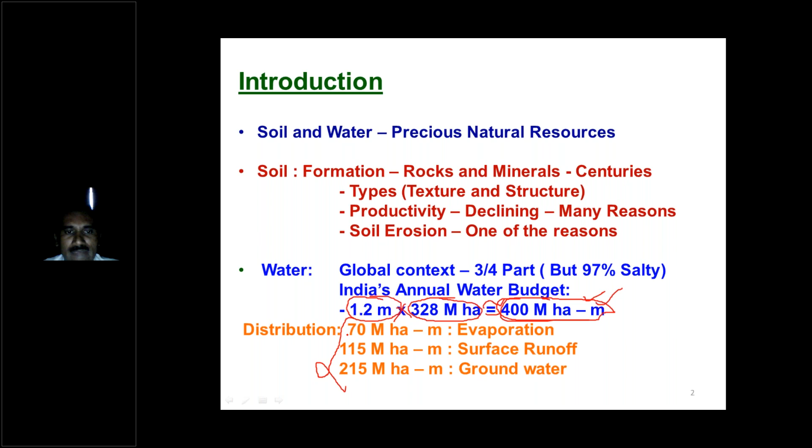Out of that, how does it distribute? Almost 70 million hectare meters goes as evaporation loss. 115 million hectare meters goes as surface runoff, which is stored in lakes, reservoirs, ponds, and so on as surface water reservoirs. Then 215 million hectare meters contributes to the groundwater and soil profile.

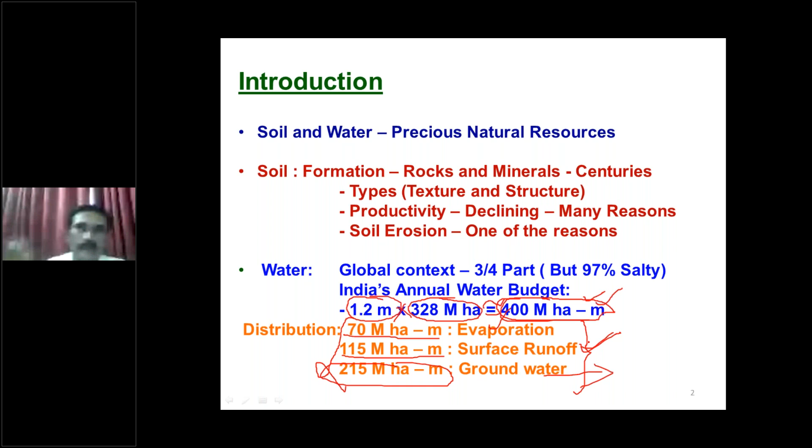So this is the annual distribution. We are very lucky, our area is surrounded by three seas, and we have a very lengthy coastline. Because of this hydrological cycle, we are very lucky. We are receiving very good rainfall, so in that way we are luckier than other countries.

Straight away going to the importance of soil and water conservation structures. We know soil conservation is very important. When we want to conserve, we should not leave soil to waste, right? So here there is one universal soil loss equation just to know the importance of soil conservation.

Now looking to the importance of these practices, when we see all these 6 parameters, we don't have control over the first 2. Rainfall we don't have control over. Soil parameters we cannot change drastically, it's a slow process. Then of course length and steepness of slope.

Yes, if economy is not the criteria, we can level the land and bring it to level land, and we can reduce the soil loss and length of slope as well as steepness of slope. But the last 2 are very important from the farmers' point of view as well as scientific community's point of view, because what cropping pattern, what crops we grow on the land, as well as what soil and water conservation measures we take up on the ground - that's why it is directly dependent on controlling the soil loss. That's why this is the importance of cropping pattern as well as soil conservation measures.

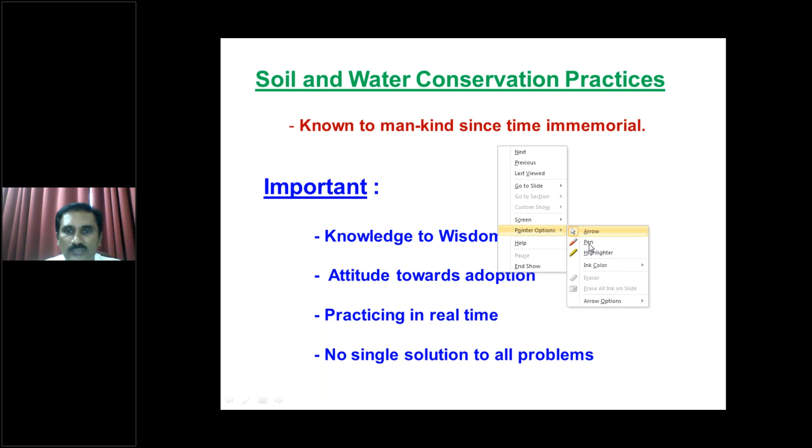Before going to the actual measures, again another point. Soil and water conservation measures are not new to us. Since time immemorial, everybody knows there are various measures, plenty of measures are there. But at this junction, what is important is common sense - like the most important thing to lead a balanced life is common sense. So the most important thing is we have to go from a sector of knowledge towards wisdom.

Everybody knows knowledge is about knowing facts and figures, but we have to move towards the wisdom side. That means practically we have to judge which is right, which is wrong. That is most important - we have to realize that.

Then attitude towards adoption - there are so many measures. One should have the right attitude: yes, this works out, we need to adopt it, it's better for the betterment of our future, for environmental effects and so on. So we need to have that attitude. That is very important. Then once we already know, and still we have good attitude, but still not practicing, it's not good - in real time we need to put them into practice.

That is very important. And the last thing is, there is no single solution for all problems. There are many kinds of problems, and they are region specific. So there is no single solution for all the problems. Once we know the measures, we should know under what conditions they work, and we should be very practical and wisdom oriented - whether it works out or not.

So I'll straight away go for some very good technologies. As I said, many of you may even know better than me, but the thing is we need to realize and put them into practice. That is very important. I'll be highlighting 1 or 2 points related to that wherever required.

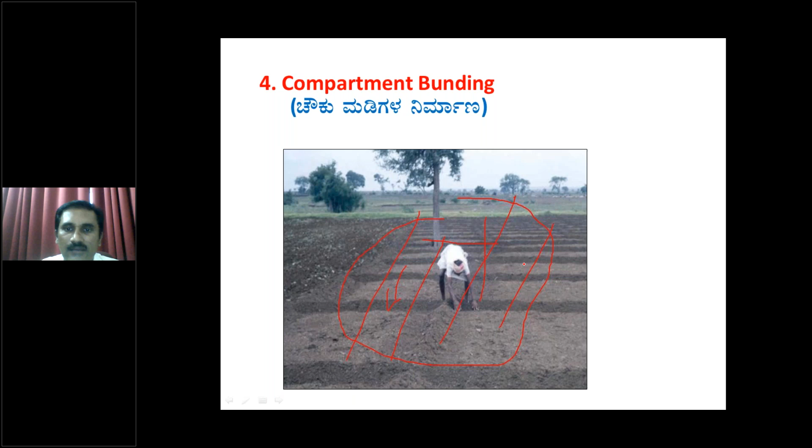So at the end of the Kharif season, we do compartment bunding like this, which conserves moisture. Then for the Rabi crop, we plow it and take the crop. These practices are very much adopted especially in the northern Karnataka region, to conserve moisture as well as soil.

This is more applicable to irrigated land, but even in dry land it helps, except for one constraint: economy. If we are sound enough to invest in land leveling, that is the best practice. But another constraint is soil depth, which should be sufficient. Otherwise, if you remove soil from one place and replace it elsewhere, the remaining soil should still have sufficient root zone depth. So considering both economic and soil depth criteria, the best way is land leveling.

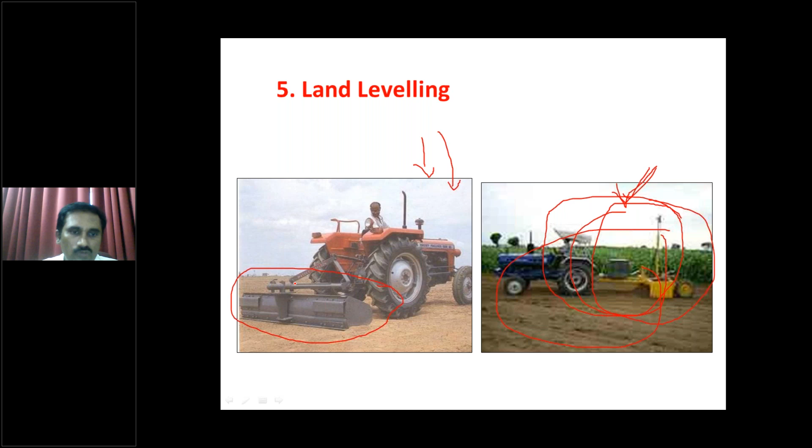Before introducing laser leveling, we have to do normal leveling with our regular levelers. Otherwise, depth of cut cannot haul, it cannot take too much soil. Its sensitivity range for depth of cut is very less.

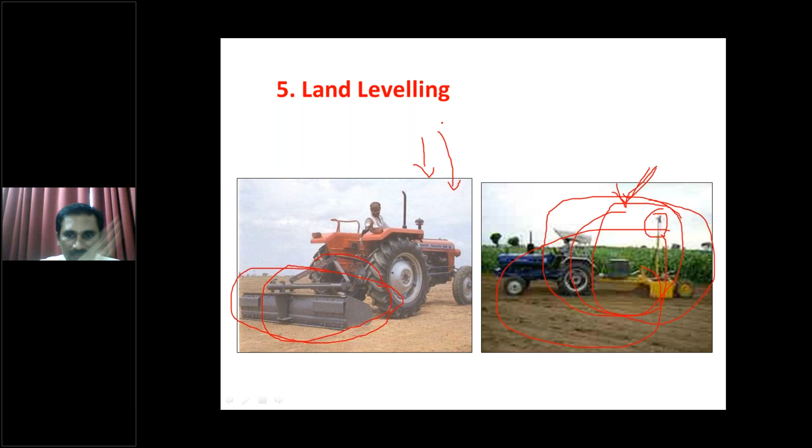That is very important. If we go for land leveling, as explained in one of the equations, L and S - length of the slope and steepness of the slope are reduced. So we have better control of both soil erosion and water conservation. Uniform moisture distribution will occur when rainfall falls; otherwise it goes as runoff and takes away the moisture. So land leveling is one of the important factors.

Then comes bunding. Many of you might have experienced this - bunding is a very essential component even in NREGA, in rural areas, in watershed management programs or any Jal Shakti programs. So everywhere, this bunding is very important at farm level to control soil as well as moisture conservation.

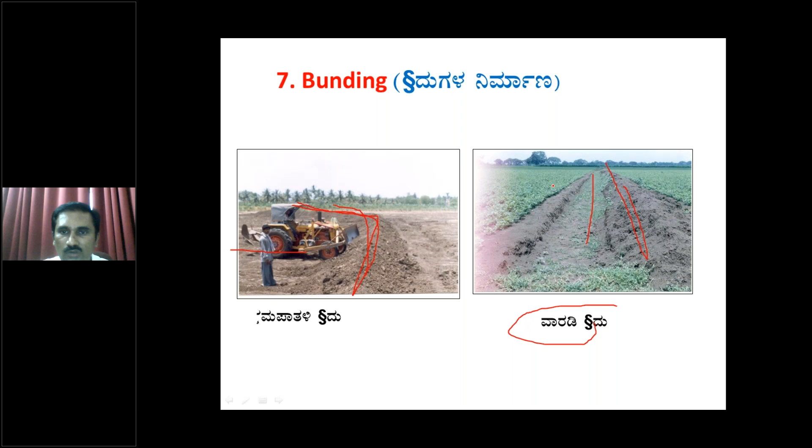Then another type is graded bunding - this is the bund, and this is the channel along the foot of the bund. Contour bunds are used for conserving moisture and soil in low rainfall areas, whereas graded bunds are used for high rainfall regions and soil conditions where infiltration is very low, like clay soils. Soon runoff occurs, and if the bund is too high, runoff stands there and hinders the crop standing.

So it has to be removed out - under heavy rainfall regions as well as soils with low infiltration rates, we need to provide channel-like structures along the foot of the bund. Such structures are called graded bunds. So contour bunds are for low rainfall regions, and graded bunds are for high rainfall as well as low infiltrating soils. We need to use these conservation measures.

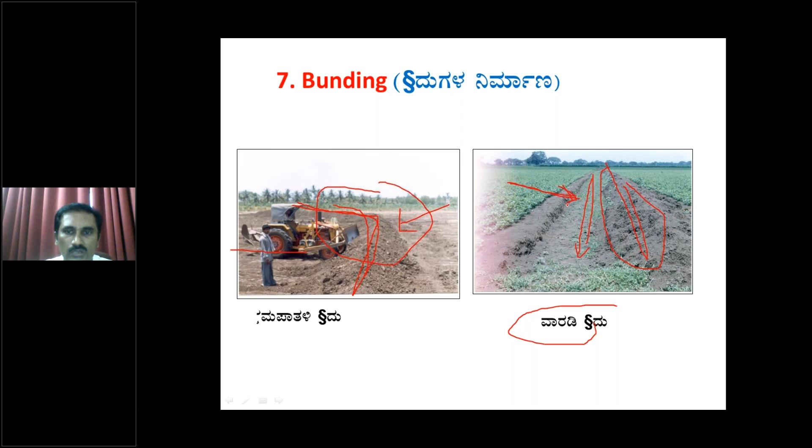These are very important. Likewise, in MGNREGA, at farm level, trench-cum-bund structures are very effective. In the MGNREGA program, most conservation works at farm level are for only three things: farm pond, bunding, and trench-cum-bund.

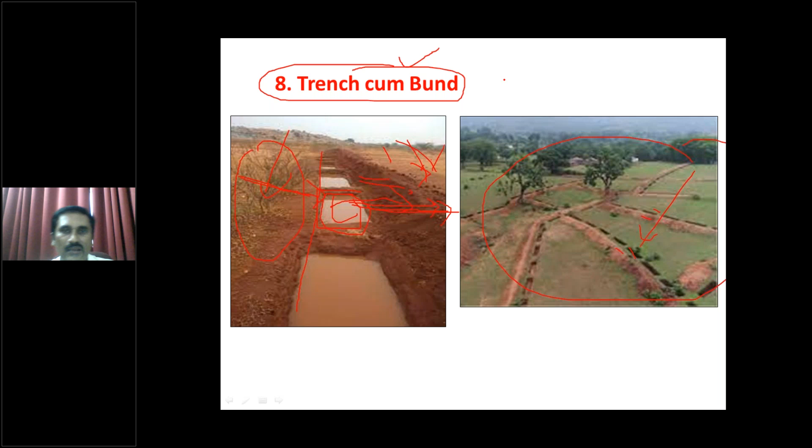One of the mistakes we make with bunds is this: in the previous case, we saw a graded bund with a channel, which is okay. But when we want to conserve moisture, especially in low rainfall areas, we go for a plain bund, and there will not be any provision for an outlet. That is the biggest mistake we make when bunding, even in watershed areas, and in many cases even in MGNREGA programs. Providing a proper outlet is very, very important.

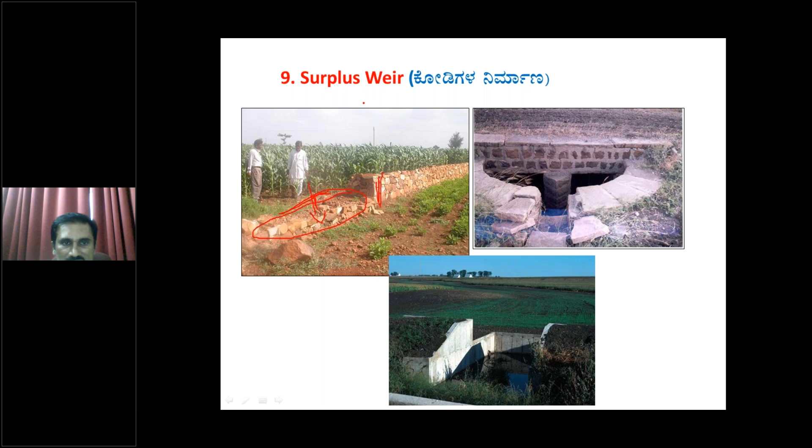For example, if the height of the bund is 1 meter, we need to decide how much water should stand there, either 5 or 10 centimeters. After that, we need to provide an outlet, which we usually call a surplus weir. A weir is a structure which takes and conveys water. Surplus means the extra water we need to convey through this weir, so we call it a surplus weir. There should be a provision for taking out that extra water.

We only allow 5, maximum 10 centimeters of water to stand, depending upon the soil conditions and elevation. Then it has to pass through to the next field or to the nearby nala. We have to have that provision, which is called a surplus weir. There are various kinds of surplus weirs, even cement concrete surplus weirs.

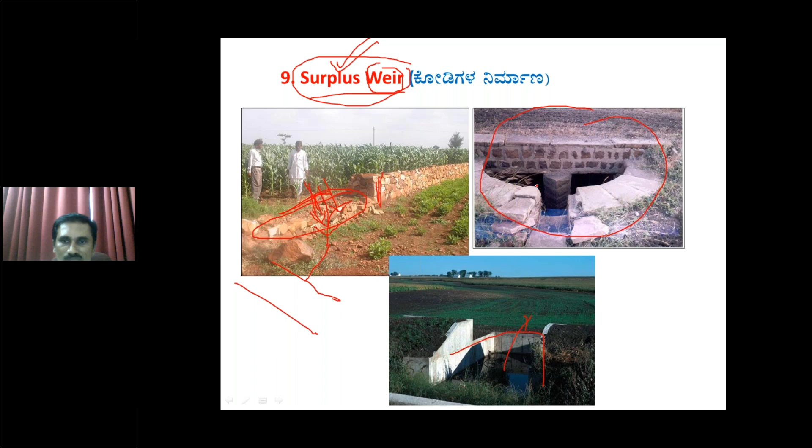This is one of the surplus weirs, an inlet type, below the bund, in the Bijapur area, Hungund area. This was constructed 200 years back, and it is still existing. These surplus weirs are very important to remove excess water, because once a bund is there, water should stand only up to a certain level, after which it has to pass through. Otherwise, if it impounds up to the height of the bund, it breaches the bund, overflow occurs, and somewhere it breaches off and everything gets eroded. That's why a surplus weir is very important.

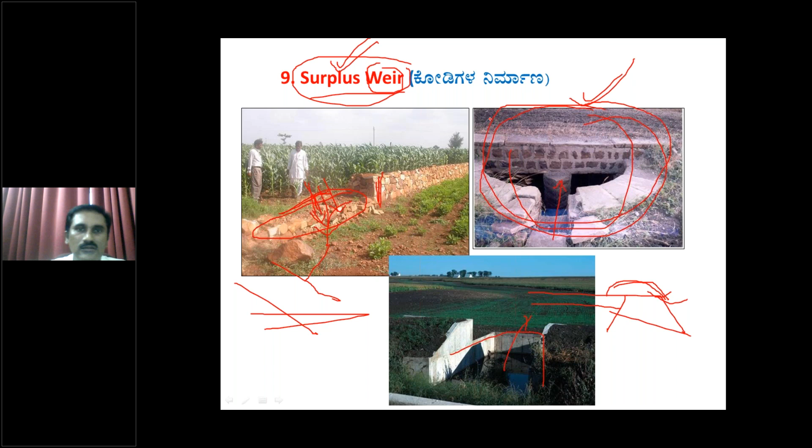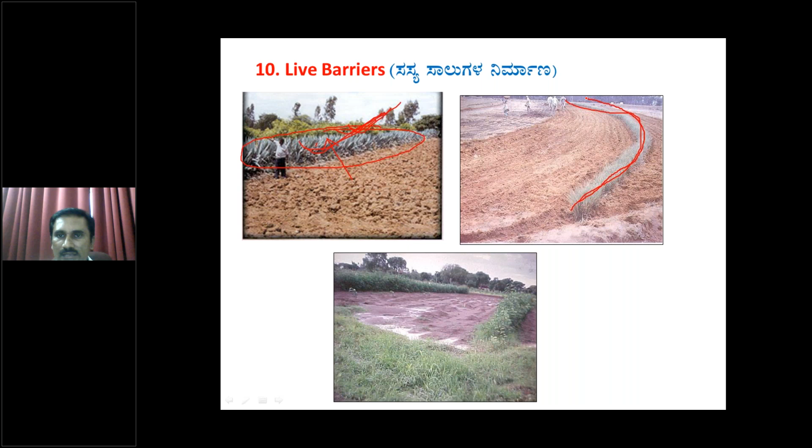Likewise, we can have khus grass grown on a contour line, as a contour bund, which is very much grown. It can sustain its life in dry land areas under very low rainfall. Similarly, some other plantings can also be taken on the bund so that we can control erosion and moisture conservation will also be done.

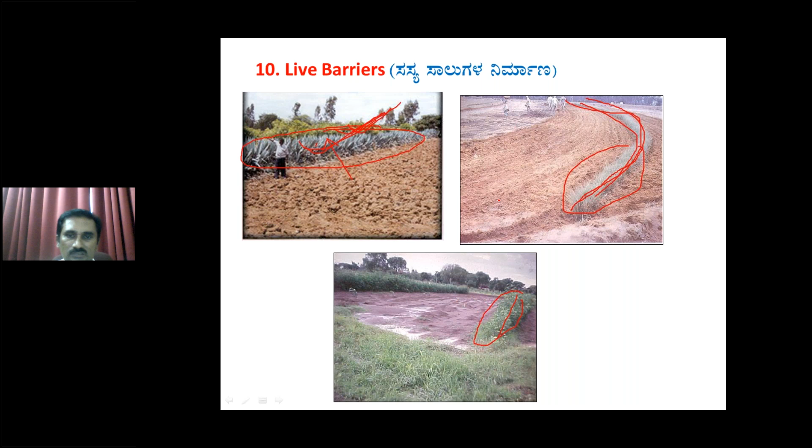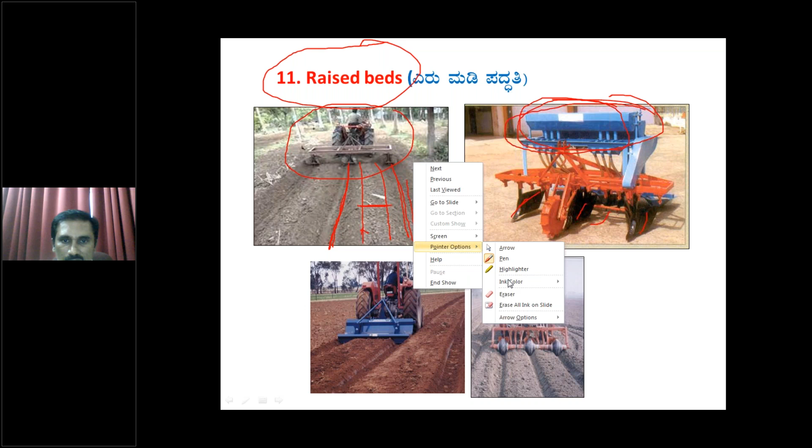Yeah, you can clearly see this. So here it is, it is a furrow here. Now this is the broad bed. So one row here on the bed, another row here. Like that, two rows can be taken up on the bed.

Water will be conserved in this. Suppose excess runoff or excess rainfall occurs, then runoff can be removed. When low rainfall is there, we can tie these ridges and control the water not to flow, to stay there itself, to infiltrate. That's what we can do.

So that's why raised bed technology for dryland also, for spaced crops, is an excellent one, right? Up to 2% slope it works well. If it is more than 2% slope, then there is some erosion problem and all.

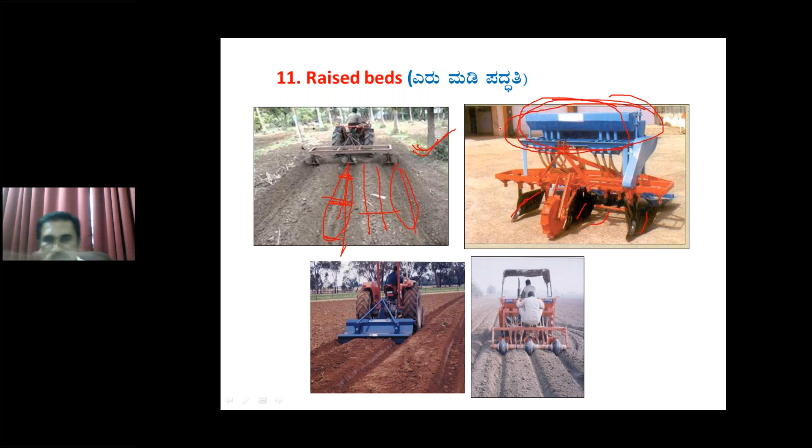Similarly, as we go for ridge and furrow systems in irrigated areas, in dryland areas also there's nothing wrong with having ridges and furrows, just 10 centimeter height, 5 centimeter height, with a simple instrument across the slope. Because water has to flow in this direction, across the slope, it has to rise and go, so there's a lot of infiltration opportunity time and runoff will be very low.

So it is in level condition. Based on the photography, you may feel the direction of slope is in this direction, but it's not like that, it's just based on the photo. It is looking like that, but it is almost leveled. The slope is in this direction, that's why ridges and furrows are in the opposite direction to the slope.

This technology can also be tied if it is a very low rainfall area. If it is heavy rainfall, you can take this out. So for growing crops, once you plow, you can very well take up the crop. It will not be any hindrance for taking up the crop.

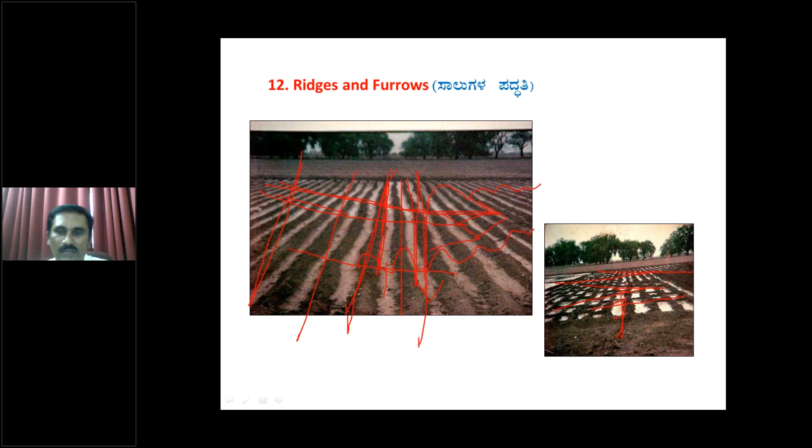So that's one of the measures. Then conservation furrows. For example, in southern India, in Mandya, Kolar, Chikkaballapur and areas like that, ragi is a common crop near Kolar, Bangalore. After 10 to 12 rows of ragi, we can have a small conservation furrow, where at least two rows of red gram can be taken up, or any other tall growing crop.

There will not be hindrance between this crop and this crop, since their timings are different—harvesting differs because this is a long duration crop. So whatever moisture is conserved here helps without much reduction in the yield of the main crop, say ragi, without much reduction.

So we can conserve moisture here, and we can even go for mulching also. Then the moisture is conserved, and we will get a better yield from these two rows of red gram also. So at certain intervals we can have such conservation furrows. This is one of the technologies again.

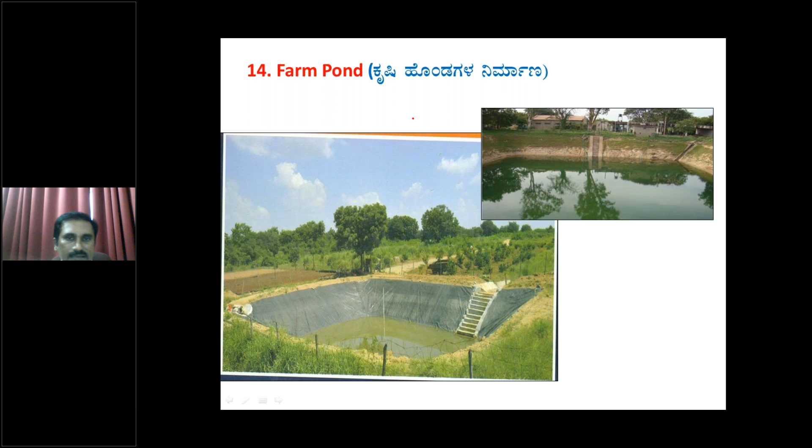Then of course everybody knows, as I was highlighting earlier, farm ponds are one of the biggest, the right choice in dryland areas, ranging from 1 hectare to 10 hectares, depending upon the runoff we expect.

Runoff can also be calculated, say for example with the simple formula KPA. Every field has a runoff coefficient—it does not allow all the water to flow, it will capture some, depending on soil conditions and how much runoff capacity it can generate. Then considering the total rainfall in a year and the contributing area, we can approximately calculate how much runoff we can expect. All the expected runoff does not come in a single event.

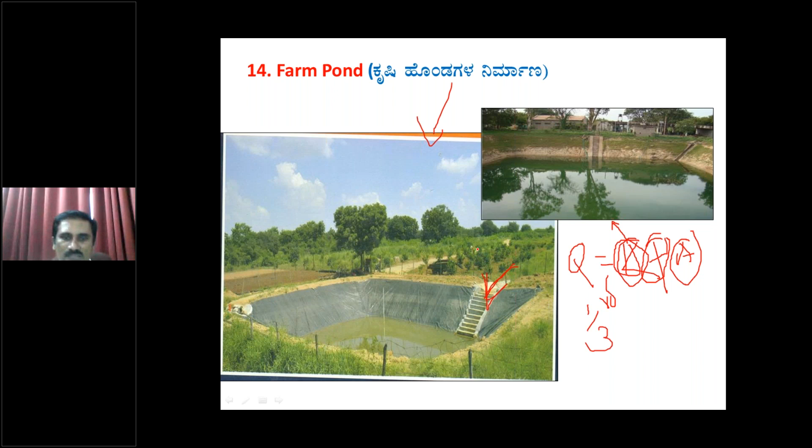irrigation with stored water, which has been conserved, for giving supplementation. The main purpose is not to recharge the groundwater. That is one thing, it is not. That's why you see, what is the need of putting polythene here? We don't want to allow seepage to contribute to the groundwater. Seepage has to be controlled, that's why polythene is put, right? So we have to control the seepage losses, and this water has to be used for supplementary irrigation.

Because in drylands, what happens, say if there is a dry spell - say July has good rainfall, but August 3 weeks no rainfall - at that time if you give one irrigation, almost you can save 30 to 40% of the yield, because every crop has got phenological growth stages. There are very critical growth stages. For example, flowering stage is one of the critical stages for any crop. In flowering stage, if you don't give irrigation, or if it doesn't receive rainfall, the yield will be lost. That's why under such critical conditions, if we give one irrigation, almost 30 to 40% of yield can be saved. That's why water stored in the farm pond has to be used for supplementary irrigation, but

the intention of farm pond should not be recharging groundwater. For recharging groundwater, other structures are there.

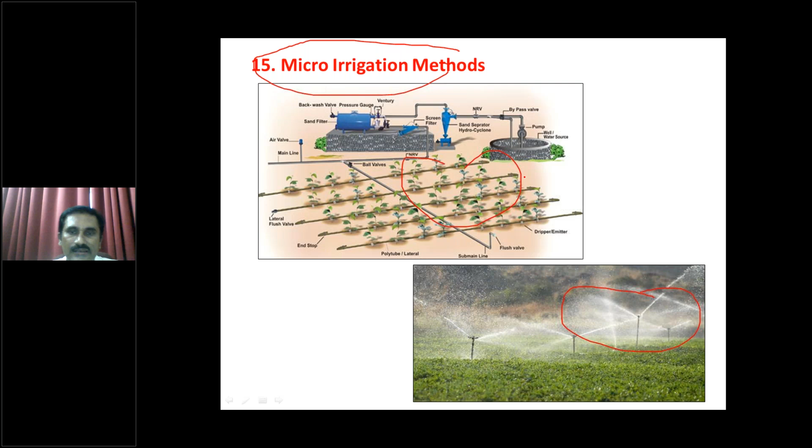Then, of course, adapting with the conserved water, adapting micro irrigation technologies. Everybody knows drip irrigation and sprinkler irrigation are the advanced irrigation technologies where water can be used very precisely.

But one thing we need to remember under this condition is, when we want to go for drip and sprinkler irrigation - for example, for us human beings, we have many organs. The heart is an important one because we only have one heart. If one of two hands is cut, no problem, we can still manage. Likewise, the heart of a micro irrigation system, either for drip or sprinkler irrigation, is filters. That's why we need to have these, because when we go to the fields and survey, this is the biggest mistake farmers make, and even companies are happy because they want to sell more products.

Once they get damaged, that's fine for the companies, but from the farmer's point of view, we need to adopt these filters. There are mainly 4 kinds of filters, which we can group into 2 kinds: primary filter and secondary filter. The first 2 - sand filter, also called gravel filter, and hydrocyclone filter - these 2 are primary filters. Then the next 2, screen filter and disc filter, are called secondary filters. So based on the water source, we should have one filter from the primary filters and one filter from the secondary filter. That is compulsory because filters are the heart of the micro irrigation system.

For example, when we have water source as an open well, algae and floating material, which are inert materials, will be in the open well, so then certainly we have to go for sand filter. For example, we have deep bore wells - though the water is very clear, if we hold our hand and see, even sand will be coming with that. To separate sand, we need to go for hydrocyclone filter. So based on the water source, either sand filter or hydrocyclone filter has to be used as a primary filter.

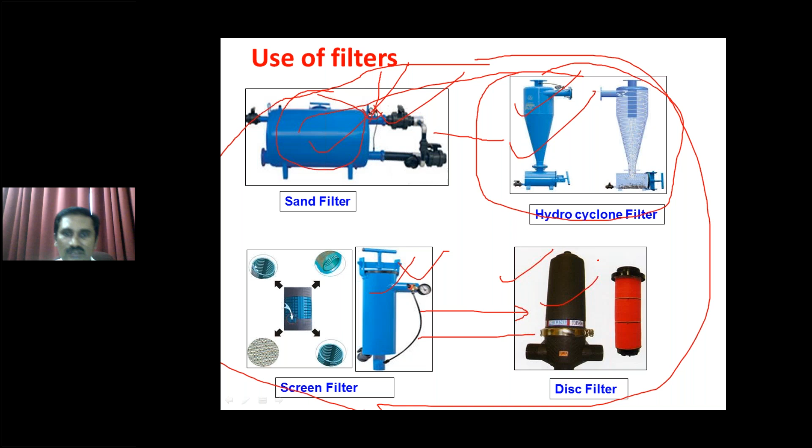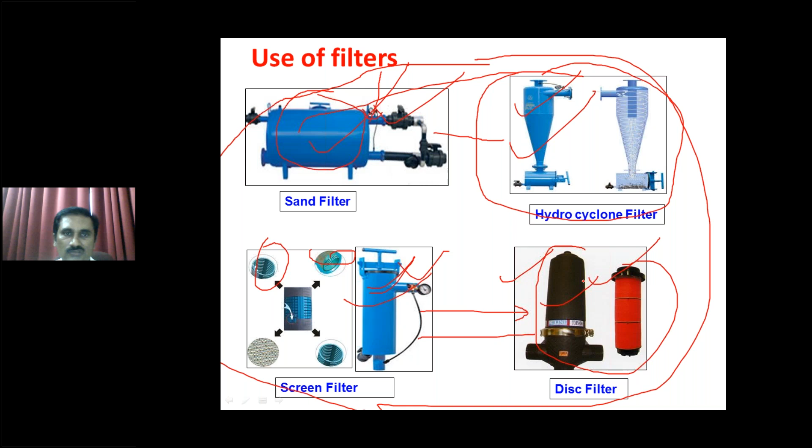Then along with this, we need to use any one of these as a secondary filter, screen filter as well as disc filter. Disc filter is far better than screen filter - the simple screen is made up of various materials like wire mesh, but this disc filter is very good. Of course the cost is high, but still we can go for disc filter. So use of filters in micro irrigation is very important, right?

One of the neglected components in today's farming scenario is that we always want more money, but with monocropping. That's the biggest mistake we unknowingly make. Everybody goes for monocropping - tomato acres together, chili acres together, that's all. So monocropping is the biggest hurdle from the farmer's side. Everybody knows it, so we want to go for multiple cropping.

We want to go for an integrated system. Even in 1 acre of land, one family can very well sustain, whereas we have seen across the state and country that even farmers having 20 acres will be in debt. They will not be able to maintain even one family properly - that's what we have seen, even with 20 acres of dry land. But even with 1-2 acres of dry land, we can manage if we go for an integrated farming system - growing multiple crops instead of monocrop, along with animal husbandry, fishery, piggery, poultry, and horticulture, grass, all these things.

Multiple cropping is very important. With small land parcels, if you go for multiple cropping, then marketing is also very easy, and if one crop fails, another crop comes up. So integrated farming system is very much required nowadays, but that's what we are knowingly neglecting.

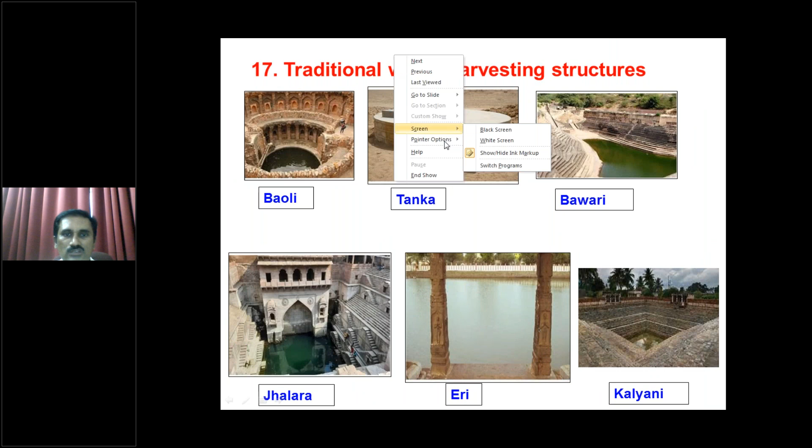As I told many of you know, since time immemorial we have had very good harvesting structures practiced since our age-old times, even before independence, during our Rajas' period. These structures have different names depending upon the state - Baoli, Tanka, Bawari are Gujarat and Rajasthani names, Eri is Tamil Nadu, Kalyani in Karnataka. So we had very good traditional water harvesting structures earlier, from overland flow and even from terraces. Such structures are there throughout the country in many places, but many times we neglect those structures.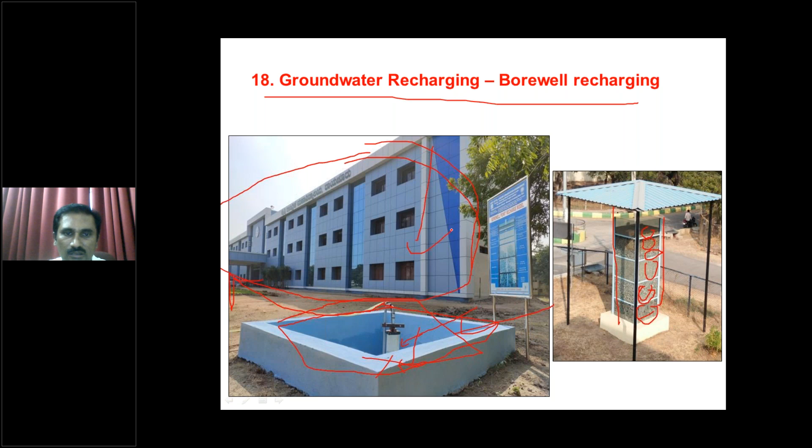The same water is used for our gardening purpose in front of the college. Borewell recharging structures can also be used with overland flow or even rooftop flow. We have other models too - this is one groundwater borewell recharging model we installed in a farmer's field last year. Suppose the borewell is here - same thing, we have to make holes for this and wrap it with screen around.

So have a rectangular pit, then cement concrete rings have to be used. Instead of directly allowing water to enter, the pit is filled with coarse aggregate - stones, pebbles, bigger size and smaller size. Runoff is let into this, it gets saturated and filtered, and goes to the ring with perforations, everything covered with gravel, which then recharges the borewell.

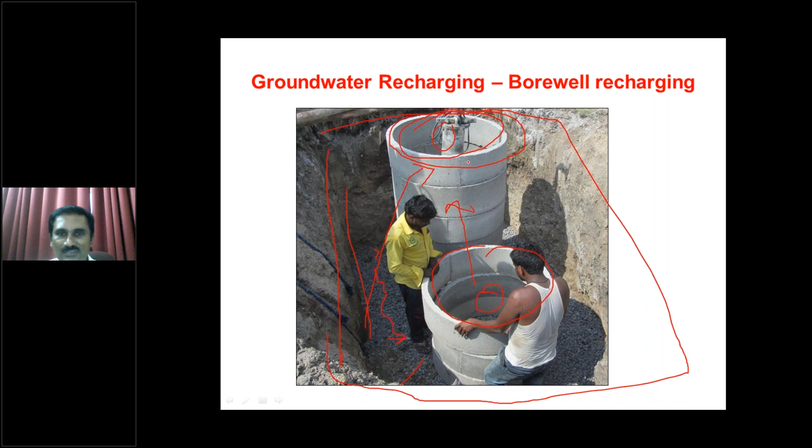We have seen a significant increase in borewell water, which has been published in our university calendar last year. We executed this near one of the villages in Raichur, and it really worked out well.

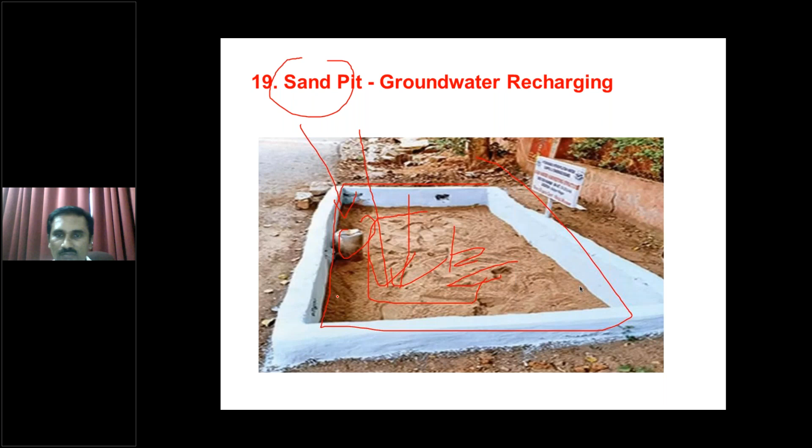Another technology - whatever runoff occurs, we make a tank called a sand pit, about 1 to 1.5 meter depth, filled with pebbles and sand on top. Whenever runoff flows over this, it gets infiltrated and can be connected to the borewell. Or at the bottom you can give a pipe and it can be stored in a nearby well. So sand pits can also be used for groundwater recharging when overland runoff flows over them.

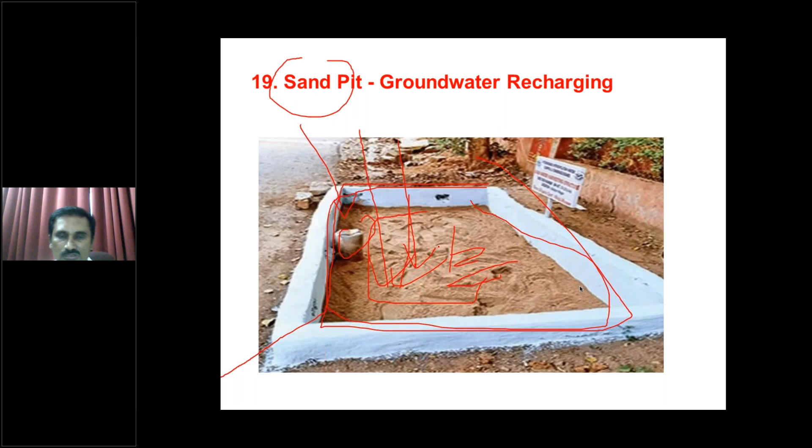Many of these technologies are already known to us. Soak pits were very common even in our villages 20-30 years back - every house used to have one. But with modernization, we don't have soak pits at all. Soak pit is one of the simplest technologies to recharge groundwater, so that is an important aspect.

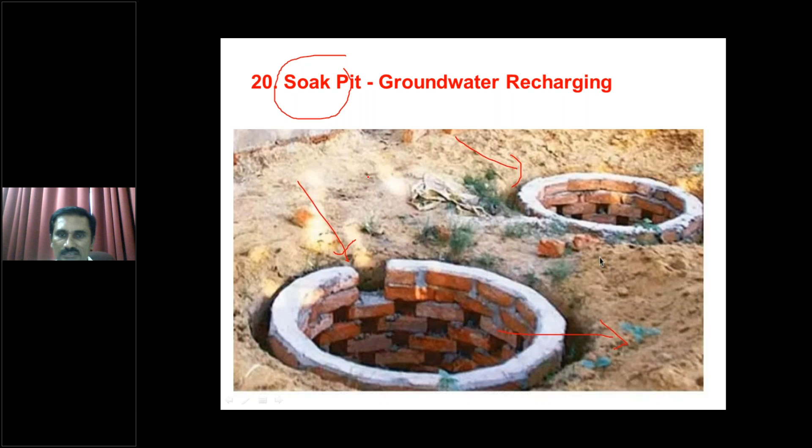Then, rooftop rainwater harvesting - for example, in our agriculture engineering college hostel, which has around 130 students capacity and about 902 square meters of rooftop area. I've drawn this to show the laterals, the collecting pipes, which are 3 inches, then a 6-inch pipe connects to the tank. This tank has 60 to 62 cubic meter capacity, that is 62,000 liters of water.

Since this is a 6-inch pipe, we have split it at the wall to divert to this side or the other side - when we don't want it, meaning when it's filled, we allow it to the nearby open well. We've adopted two screen filters before it enters, and this is the overall scenario of the 62,000 liter tank. Many times it gets filled up, and the overflow is allowed to the nearby borewell through a pipe for recharging. Otherwise, when the tank itself is filled, we divert the flow, close here, and divert to the environment. That's why rooftop rainwater harvesting can also be a very good technology.

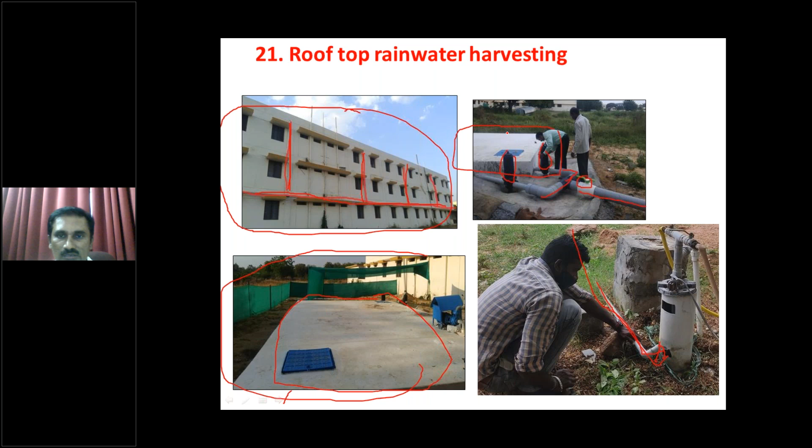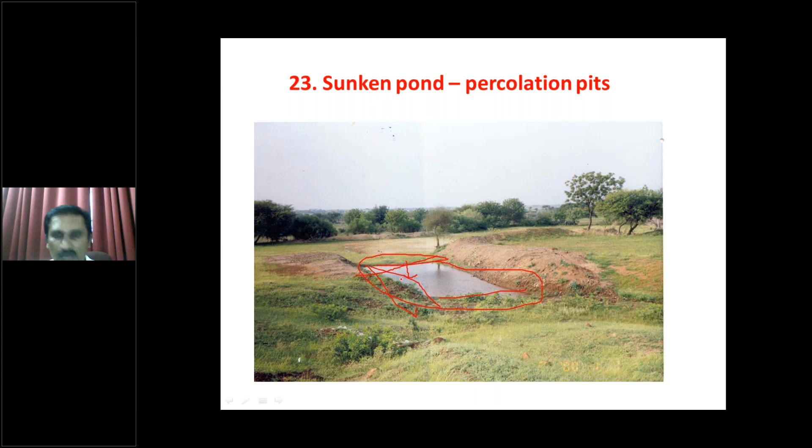Especially in watershed areas, in upstream areas where slopes are less, we can go for sunken ponds, small depth ponds of hardly half a meter depth, with about 5 meter width and 10 to 15 meter length. These are called small percolation pits. As I told you, real farm ponds are not for recharging groundwater - all these other structures are for recharging groundwater. Farm ponds are only for integrated farming systems, where you can grow fish and so on.

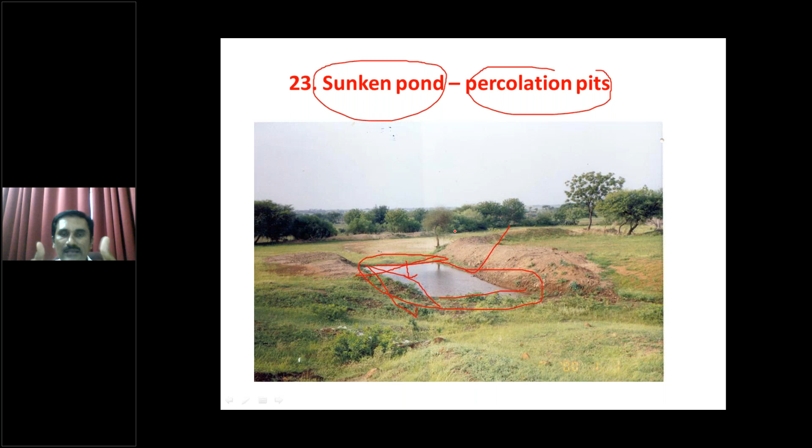The main purpose is supplementary irrigation, but all these structures in drylands are now used for groundwater recharge. Percolation pits we call sunken ponds, mainly at upstream areas, which are small structures. When we come towards the downstream area, it becomes a bigger percolation pond.

For both structures, we need to identify sites with proper infiltration characteristics. It should not be tight clay, because it should allow water to pass through and seepage should occur to recharge the groundwater. At the downstream side there will be more contributing area and a larger embankment. So percolation ponds are used downstream, while percolation pits or sunken ponds at the upstream side are more preferred for recharging groundwater.

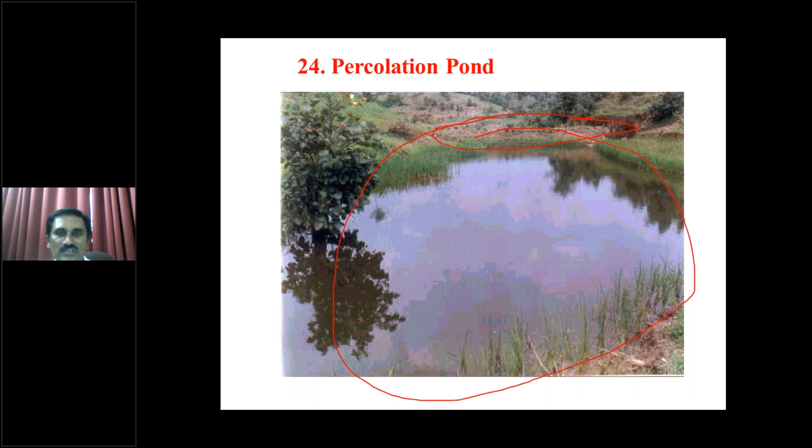Whenever slopes are very high, comparatively more than 6% or 10%, we go for contour trenches, like a trench-cum-bund system. In agriculture fields where slopes are very low, 2%, 3%, 5%, that works, but when slopes are more, 10% or so, in hilly areas, we go for contour trenching.

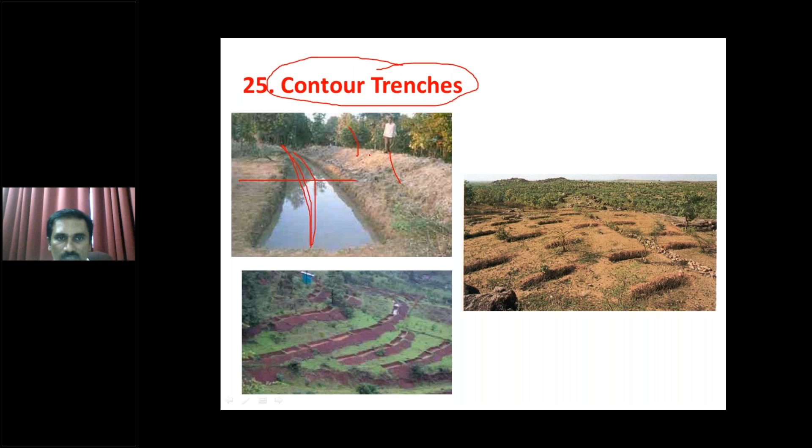So where the slope runs in this direction, we will have trenches, with the same excavated soil placed towards the downstream side. Planting can also be done here, especially forestry crops. Usually these are continuous trenches or arranged in a zigzag manner. This is a continuous trench, where one trench follows another after a few meters, continuous across the slope.

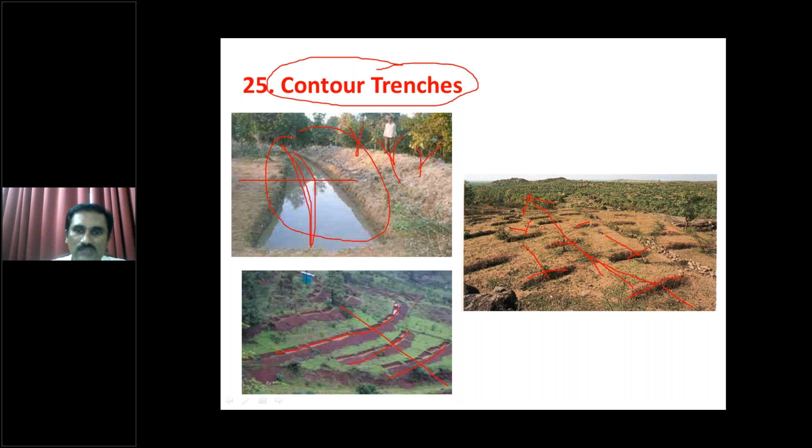But here, in a zigzag manner, we have small trenches, and exactly below this there is no trench, then below this again no trench - so it is zigzag. This way also we can have contour trenches across the slope direction. So contour trenches can be continuous or staggered in a zigzag manner. This is one of the best technologies for high slopes, even for growing forestry crops.

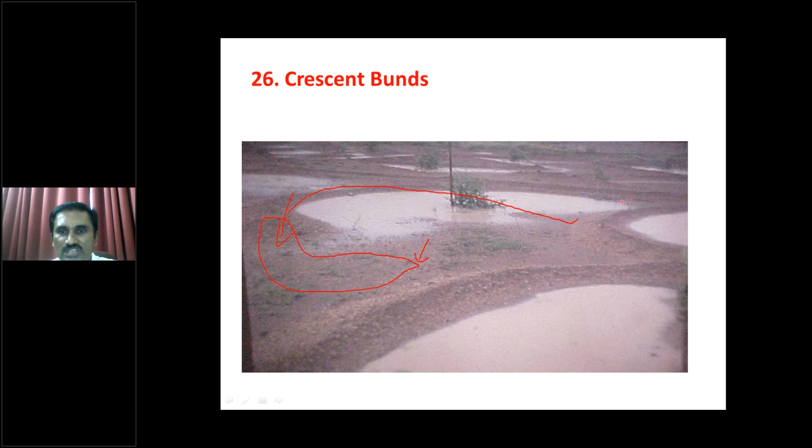Then again in wastelands, where shallow soils are present but with good percolation rates once water is allowed to stand - very shallow soils where you cannot grow agricultural crops. Though the slope is less, the soils are very shallow and stony. Under such conditions, we use a half-moon shape - small bunds where water can be stored, and there we can take up planting. This is very good for forestry crops and other plantation crops, very hardy crops that come up even in stony areas.

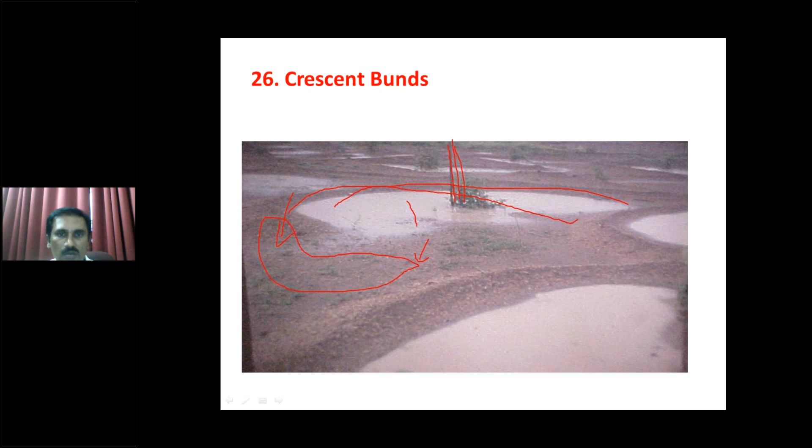So small crescent bunds can be used, and for areas even less favorable than that, small scooping arranged in a zigzag manner works better since the land is not fertile, very much wasteland, so we take up forestry crops. Small scooping is far better because once infiltrated, it gives moisture to the downstream layer, and you can even find good yield at bore wells downstream. This scooping, along with crescent bunds, percolation pits, and percolation ponds at the downstream side, are all very good for recharging groundwater.

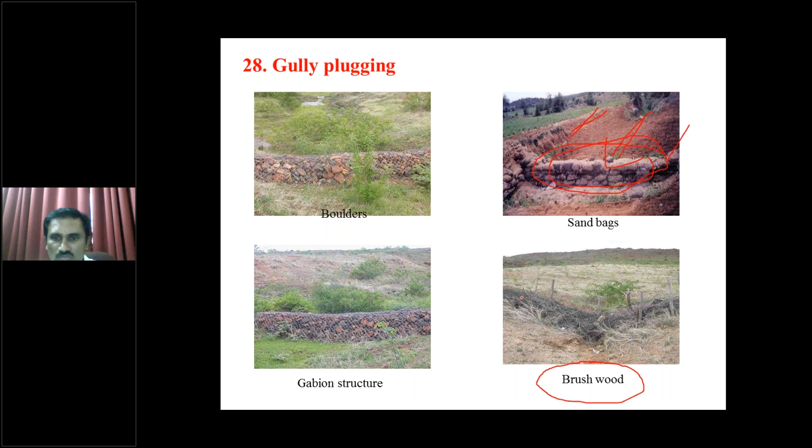Gully erosion is a biggest problem in drylands. Some of the best measures include sandbags placed across the gully, because otherwise soil gets eroded at the sides as well as at the bottom. If you want something cheaper and locally available, brushwood dams using thorny species can be placed across the gully with stakes, tied with wire so they won't flow away.

Then there's the gabion structure - if loose stones are kept as they are, they will be blown away or carried by the velocity of water. That's why they have to be tied in a sheet, an MS gauge sheet or thick wire mesh.

That is called a gabion structure. Along with the thick gauge wire mesh, it is tied so it will be in a firm condition at that site. So these are called gabion structures.

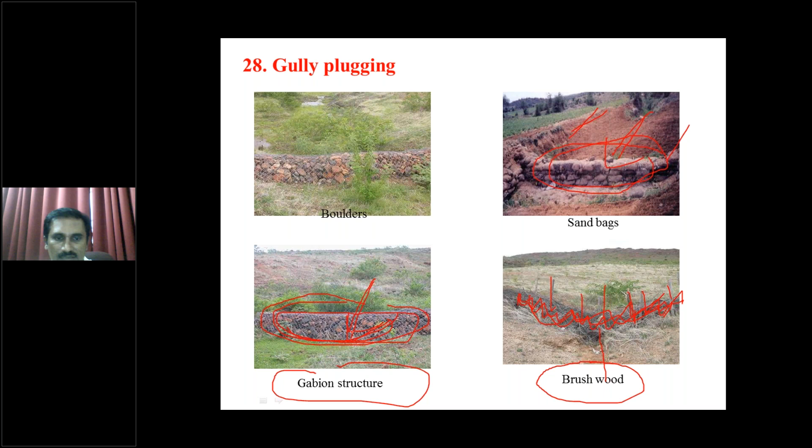Then, one of the other better structures is check dams. Check dams are very much adopted in watershed areas. Here also, like multiple uses - for domestic animals, for small other farm activities, recharging downstream bore wells, and creating a better micro environment.

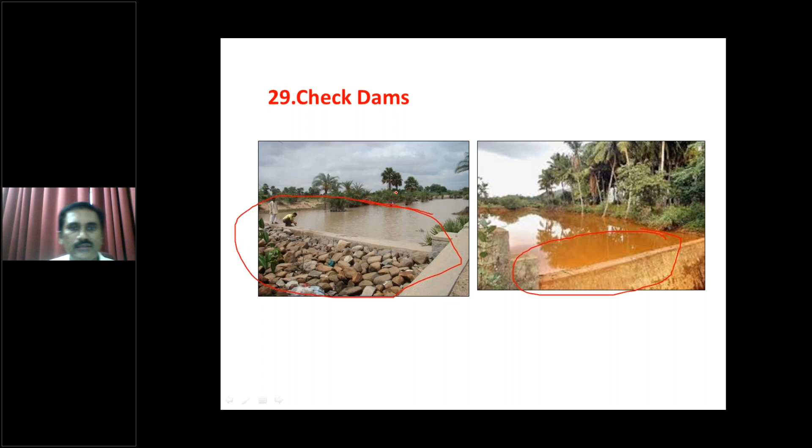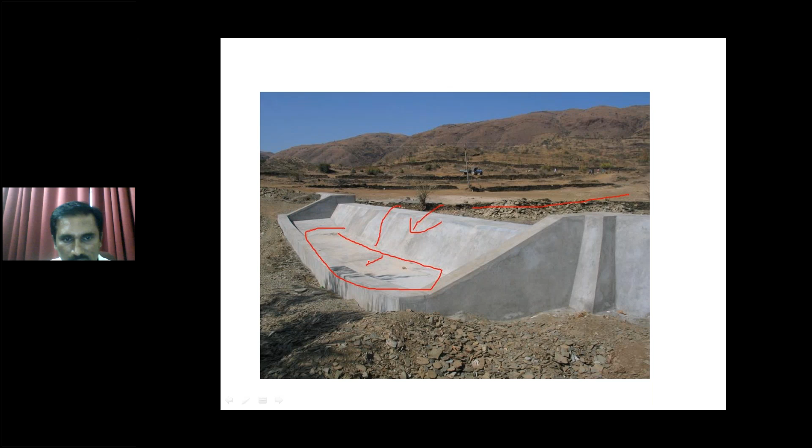Check dams are very much essential, but some components are very important. If this is a gully and this is the check dam, we should have a proper weir, then a proper apron section. The apron section is very important to reduce the velocity, otherwise it flows and takes away the soil. Then at the end of the apron section, the end sill - a raised portion of the wall.

Even in this, we have to fill with boulders so that we reduce the velocity of the water before it goes to the downstream gully. There should be a proper side wall, and likewise some components - extension of the head wall should be there. Otherwise, without extension, breaching will occur at one or other place. That's why it has to be constructed with proper components. That is very important.

Then diversion structures. These are most important at the foothills of very slopy lands, suppose hills or very slopy lands are there. Diversion drains are very important because if you don't have these diversion structures, straight away the runoff falls on the agriculture field and creates a lot of havoc.

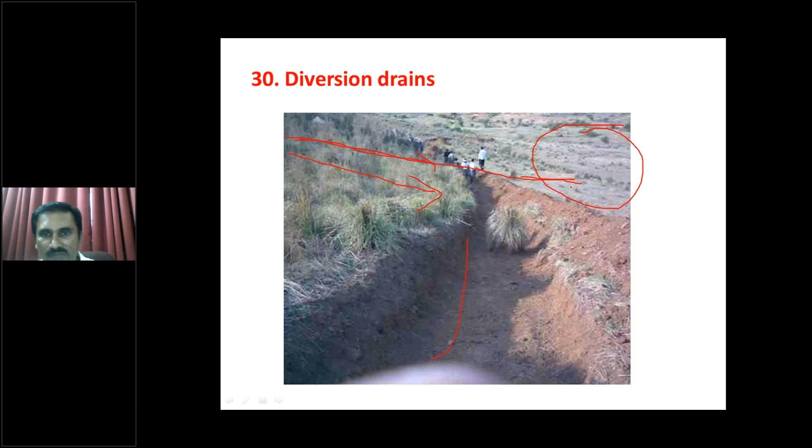Depending upon the contributing area, we need diversion structures, which are connected to the farm pond or nala bunds. The size should be lesser at the upstream side, and as we go downstream, the size should be bigger because the contributing area will be more. We should always have diversion drains at the foothills of very slopy areas, to avoid runoff entering into the agriculture field. Diversion drains are a very important component in dry land.

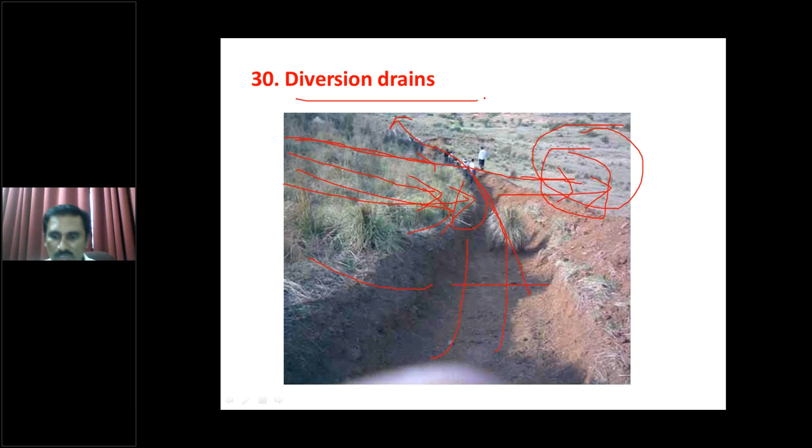So then, when we have perennial rivers, or intermittent ones - perennial rivers it's not required, but when we have intermittent flow only during the rainy season, along the nalas we can have excavation like this. We can have subsurface dykes.

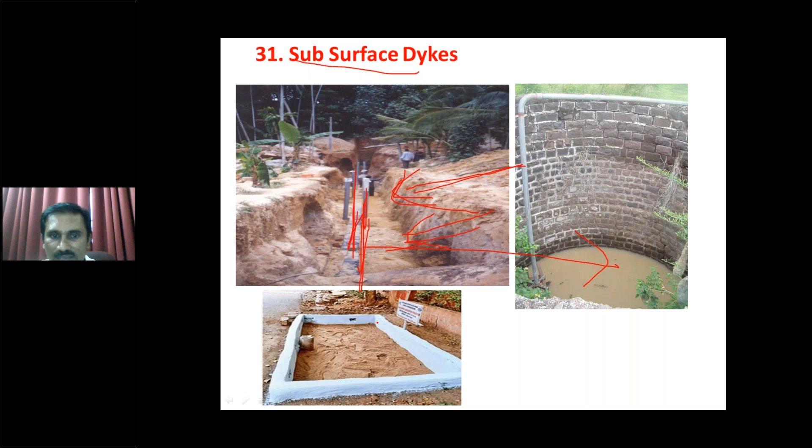That means you can have cement concrete structures, so after rainfall, even after runoff, subsurface water will be flowing. That can be arrested and connected to pipes, then connected to an open well nearby, or even sand pits like in the channel. Suppose this is the channel - from the surface of the channel bottom, we can have a 1 meter depth cement concrete tank that can be filled with boulders, then sand will be filled so that it is equal to the elevation of the bottom of the channel.

Then whenever water flows in this, it gets infiltrated in this pit, and from the bottom a pipe can be drawn and it can be stored in the well. So likewise, this is one of the technologies - wherever farms are very near nalas, such structures can be created and we can take the runoff water into the well.

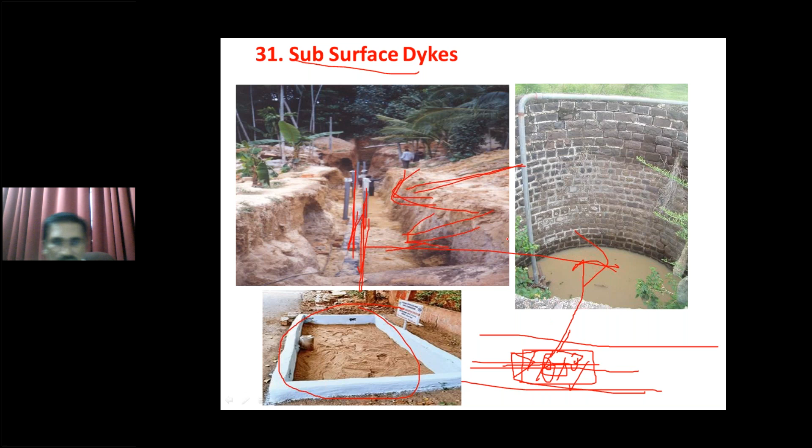So with this, maybe 40 to 50 minutes time was given. As I told, many of you may be knowing better than me, but I have not presented any scientific data here - just gone through simple wordings.